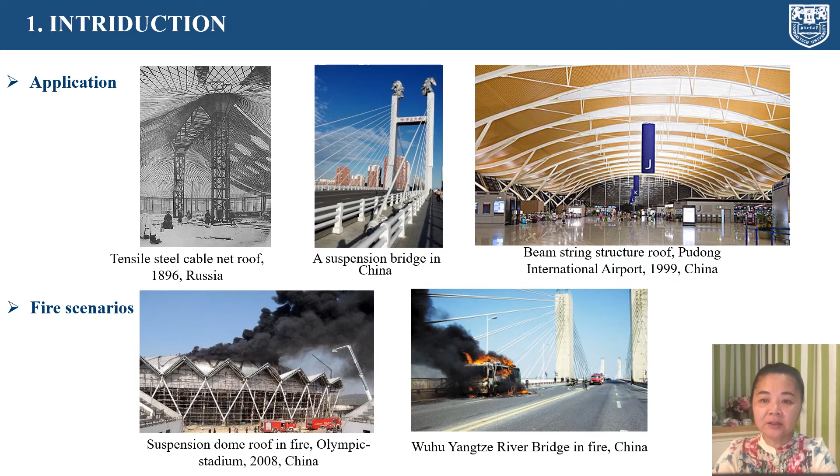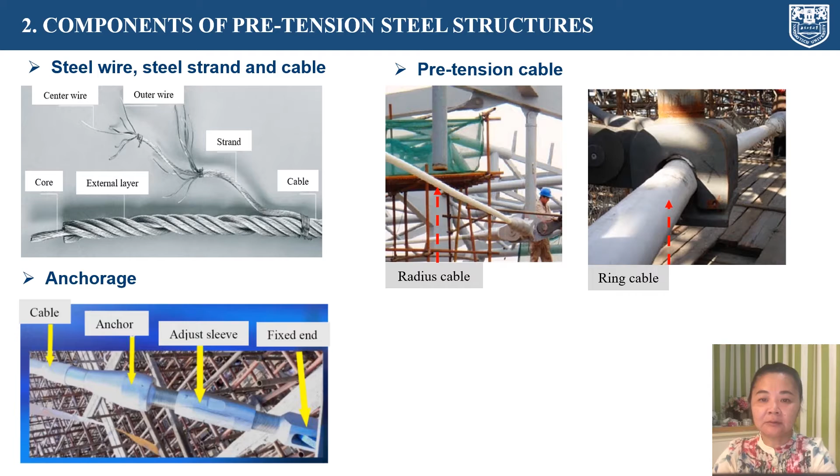Temperature distribution of localized fire is different from compartment fire. Both hot smoke and fire flame transfer heat to the environment. Herein, a flame radiation rule is proposed by regression formulas, which are based on extensive parameter analysis using FDS software simulation.

When the radius of radiation spheres is determined by a simple method, the radiation heat on the vertical surface is dependent on the distance from the center of the fire to the vertical surface.

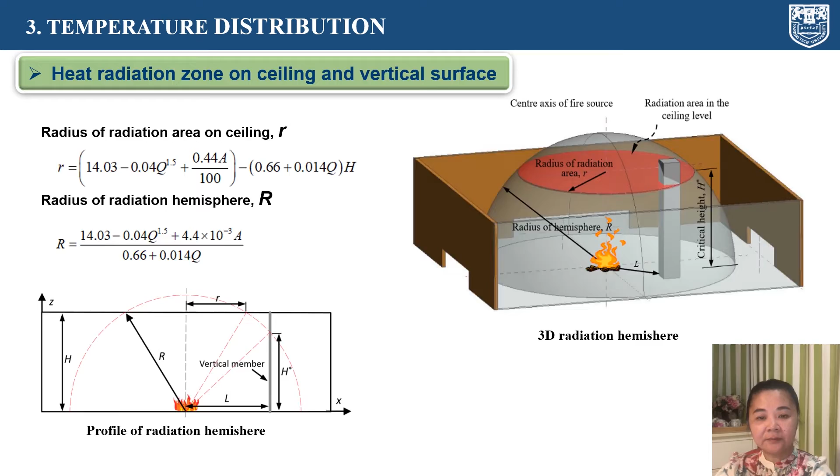Temperature distribution on the ceiling and the vertical surface has also been developed by extensive parameter analysis with FDS software. Both regression formulas for temperature distribution are dependent on the heat release rate, height of ceiling, and the coordinates in building space.

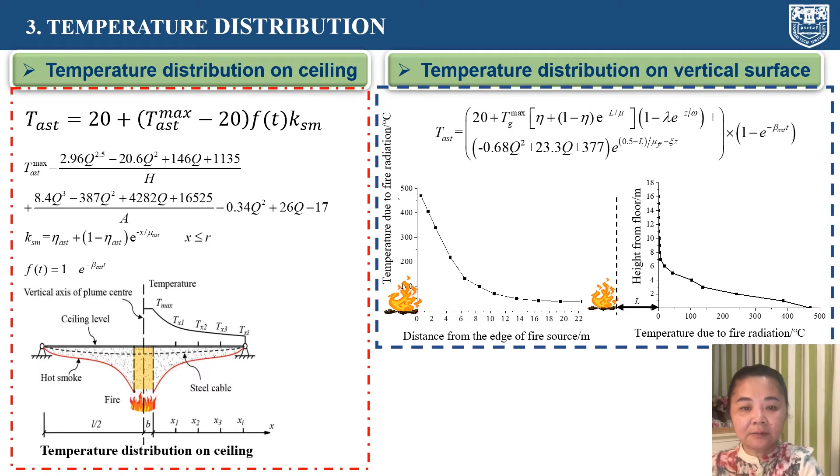The geometric contours of strands or cables with cavities between wires are different from that of steel bar. So cavity radiation should be considered suitably, corresponding to the lumped capacitance equilibrium. An analytic solution of the temperature history of a central wire in steel cables was proposed.

The temperature history in the center of steel strands is most dependent on total thermal resistance of heat transfer between environment and steel cables, thermal conduction resistance in radius of steel strands, and thermal resistance of heat transfer by radiation of cavity.

The temperature deviation between two models is up to 115 degrees in 15 minutes. The analytical method fitted well with the numerical simulation using Abaqus software.

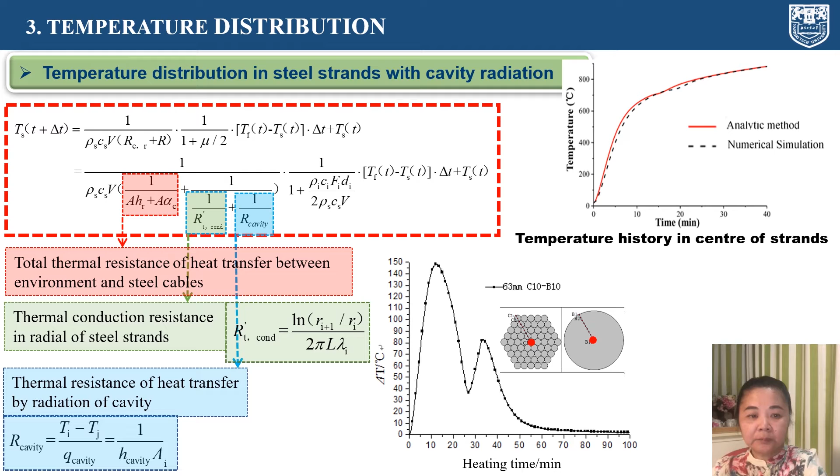Experiments are conducted to determine the specific heat and thermal conductivity of filling materials, such as zinc copper alloy for hot cast anchors, and the mixture of epoxy resin and steel shot for cold cast anchors.

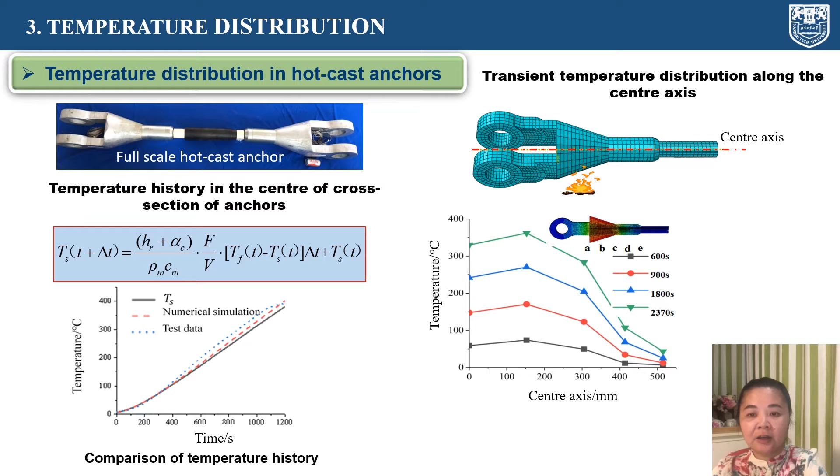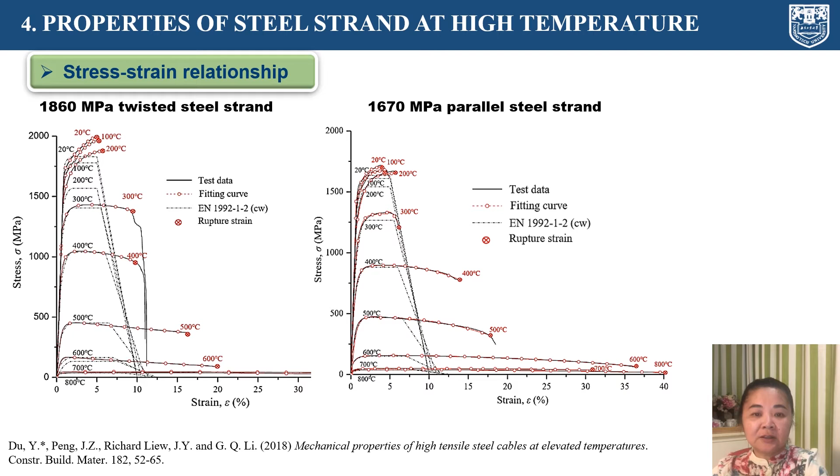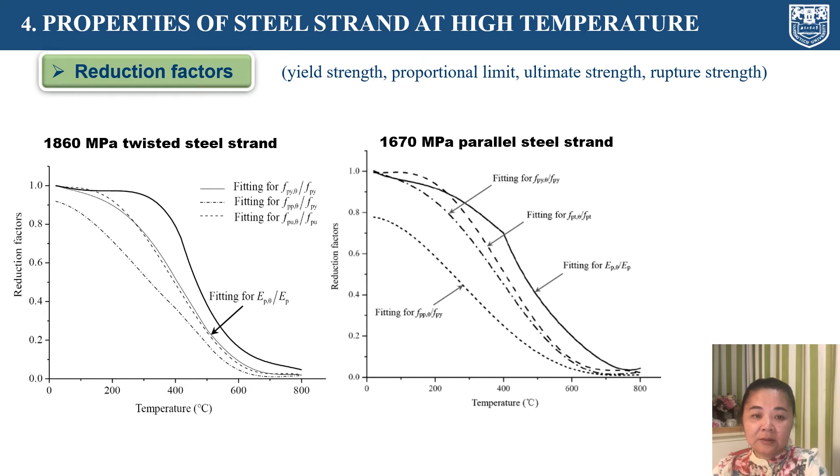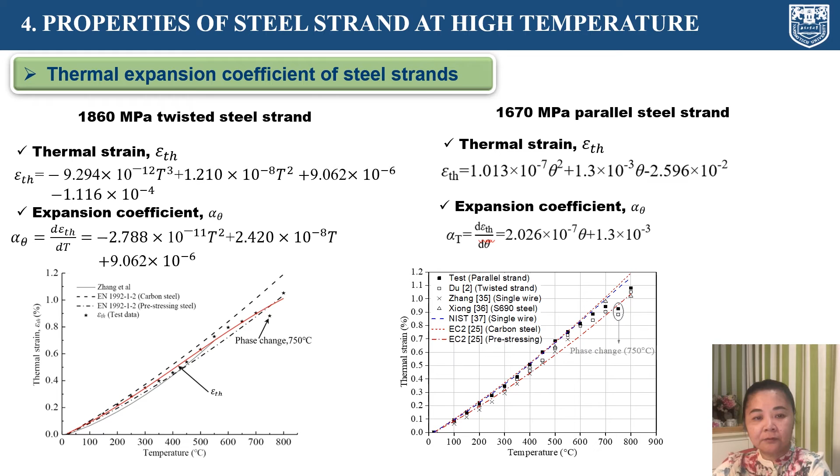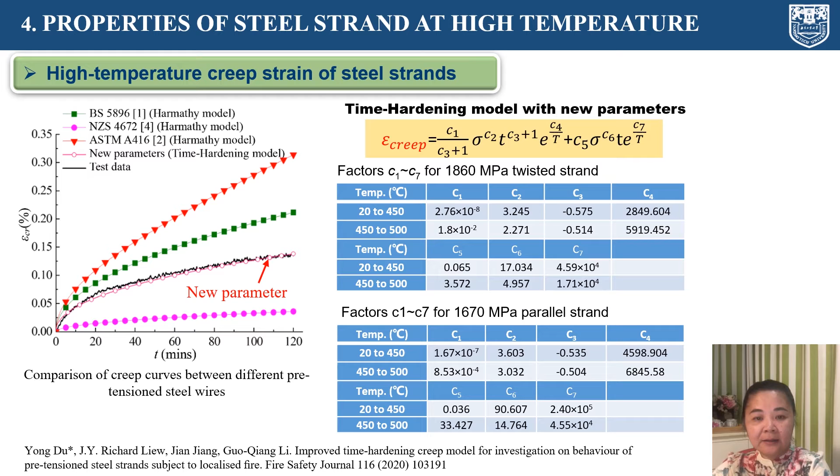Study on the material properties dependent on temperature and temperature distribution due to localized fires in nature are given above. The thermomechanical analysis of pretensioned steel structures has been investigated as below. Firstly, a general equation of the horizontal tensile force of pretensioned steel cable has been derived from force equilibrium and deformation compatibility.

A simple method has been proposed, which can benefit civil engineers to check the fire resistance of a single cable under distributed load or point load exposed to localized fire.

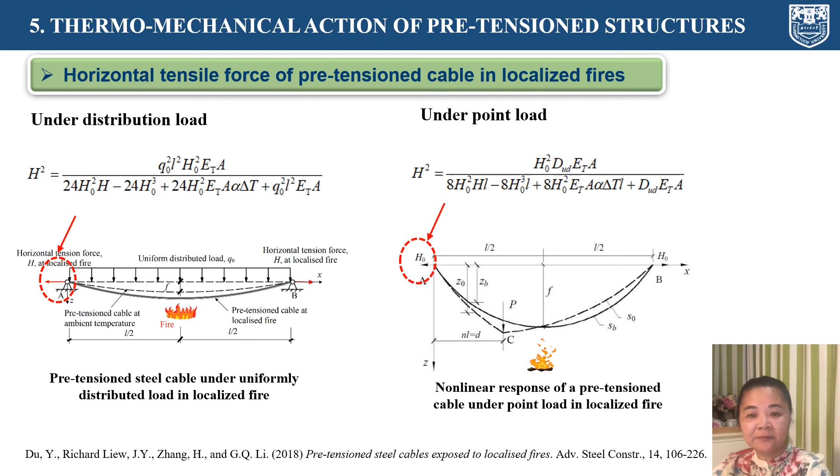Numerical analysis using ANSYS software discovered that the steel cable would fail as rupture strength is achieved at elevated temperature when the high temperature creep strain was considered. It is worth noting that the ultimate strength of cables would not be achieved at elevated temperature, since the creep strain enhanced the relaxation of cables.

Thus, when the total strain of steel cables increased dramatically due to the increase of creep strain after 300 degrees, the tensile force decreased more greatly than ultimate strength in cables at elevated temperature.

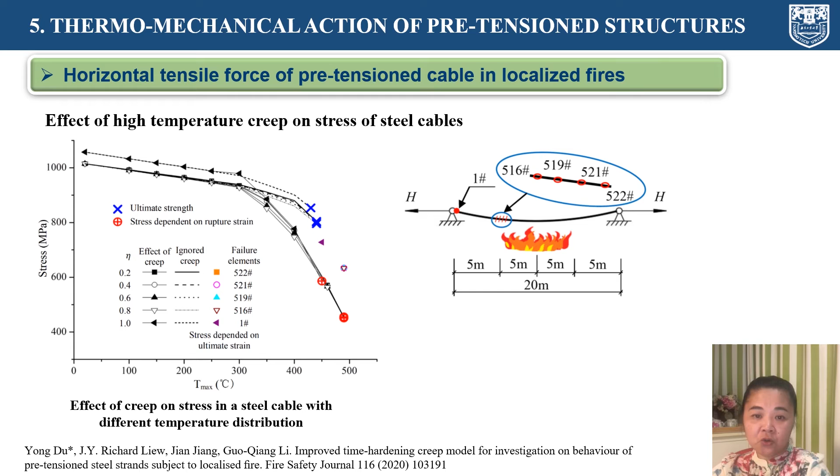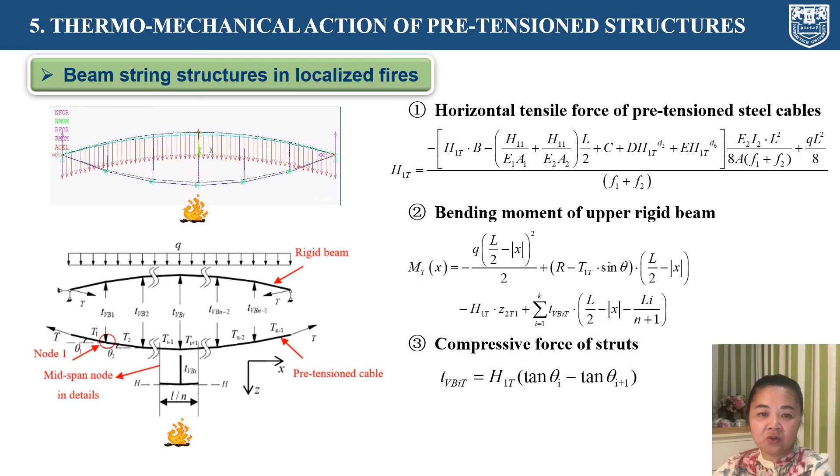General formulas of horizontal tension force of pretensioned steel cables, bending moment of upper rigid beam, and compressive force of struts were derived as above. A simple method also has been proposed to check the fire resistance of BSS structures exposed to localized fires.

A suspension dome is formed by the upper single-layer dome and the lower pretensioned cable strut system. The pretensioned ring cables enhance the stiffness of the whole structure. For the advanced method, it is worth noting that, as a suspension dome is subject to the localized fire, the non-uniform temperature distribution along the pretensioned ring cable is unbalanced due to different thermal expansion.

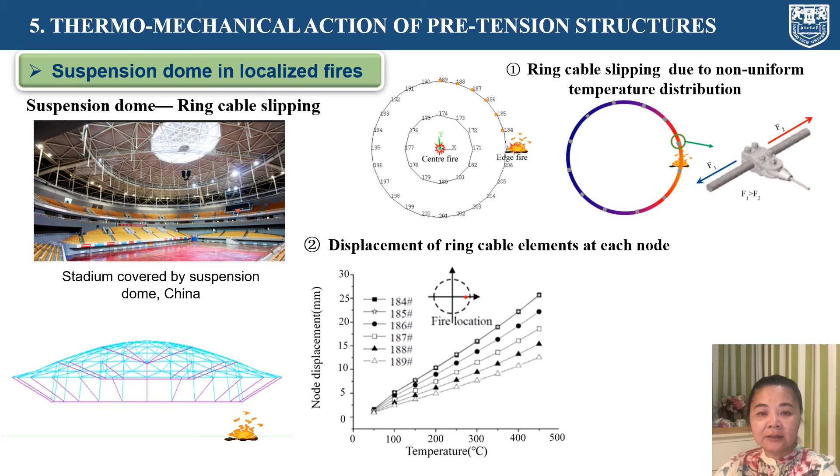Then, when the resultant force overcomes the friction between the surface of the cable and the clamping node, the cable would be slipping and the pretension force is redistributed just like an elastic band. Slipping action can be discovered by the displacement histories of ring cable elements at each node, as figure above.

In order to simulate the slipping dependent on slipping resistance by using ANSYS software, the COMBIN40 element was simplified to simulate the joint between a cable and the lower end of the strut.

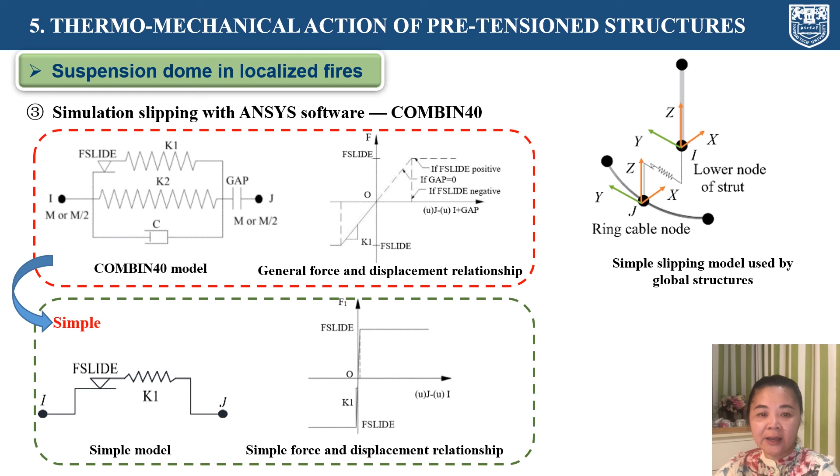Third, thermomechanical actions of pretensioned structures help to estimate the structural response under localized fire.